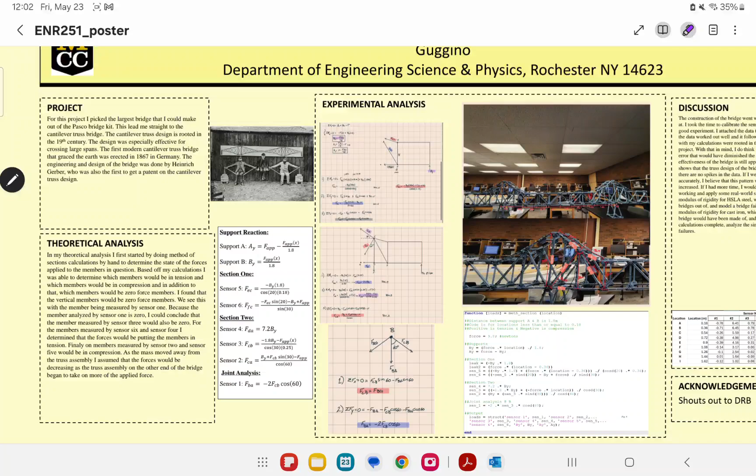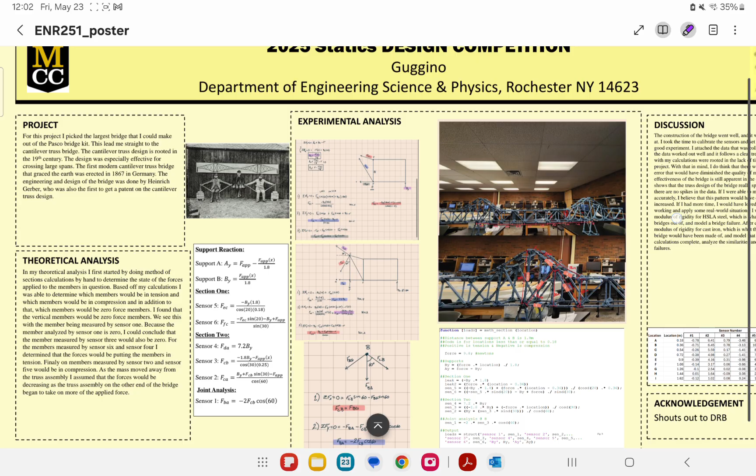Hello, my name is Cantilever Truss Bridge, and today I'm going to be talking about Nico Guggino. Wait, my name is Nico Guggino, and today I'm going to be talking about my 2025 project.

ENR251 final design project. For this project, I decided to build a cantilever truss bridge with the Pasco bridge kits that the college had provided to us.

This bridge, I didn't find it, let's just say it found me. It looked really interesting when I was looking through the couple of options that we could do with the bridge kit. And I'm really glad I picked it because it led me to some really interesting research, and I got to learn a lot about this really efficient design.

So I started the project after putting the bridge together, of course, with the help of Dr. Ben. I started with just some general research. I wanted to see if I could find anything in the country that looked similar to the bridge that I had built, and also what its origins were.

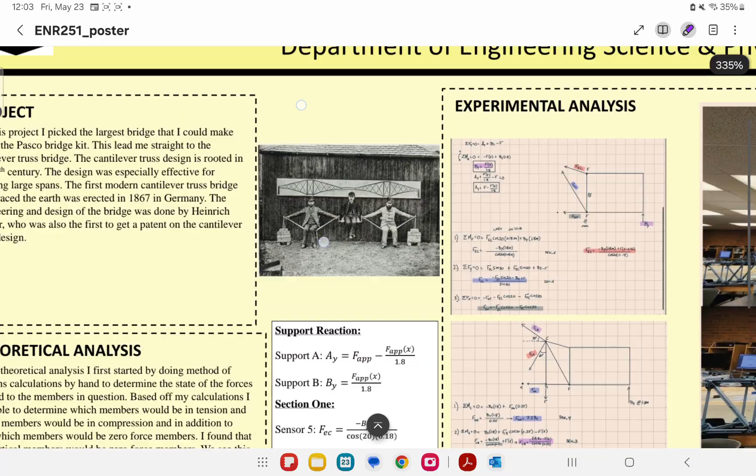So I was able to find out that the first erection of a cantilever truss bridge of this style was in 1867 in Germany by this gentleman right here, actually. That's Heinrich Gerber. He was the first one to design the modern cantilever truss bridge and also have it patented. And as far as I could tell, he's also the first one to have one erected. So it was really groundbreaking in that sense. You could see him there showing off the design.

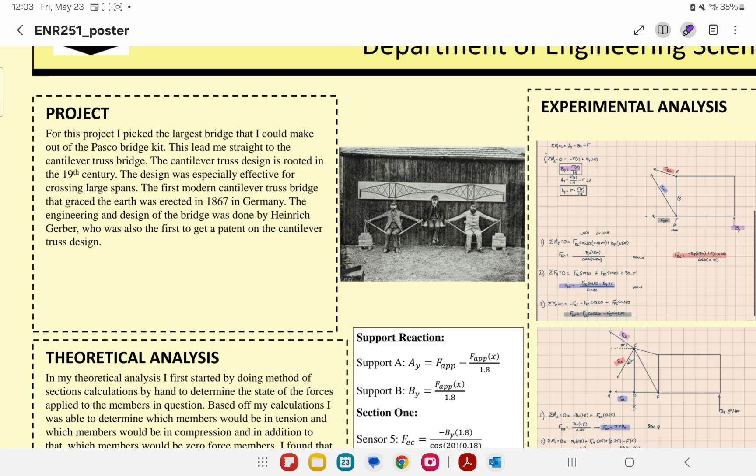So if we're looking at his simple display here, it actually really helped me do my theoretical analysis, which we'll talk about in a second. You can see, if we're looking at him, he's putting a moment on these guys like this, and they are acting as the truss, turning that moment into tension and compression. You can see this man's arm here, these arms here, are going to be in tension, right? And then all the compression is going to be in the lower members here.

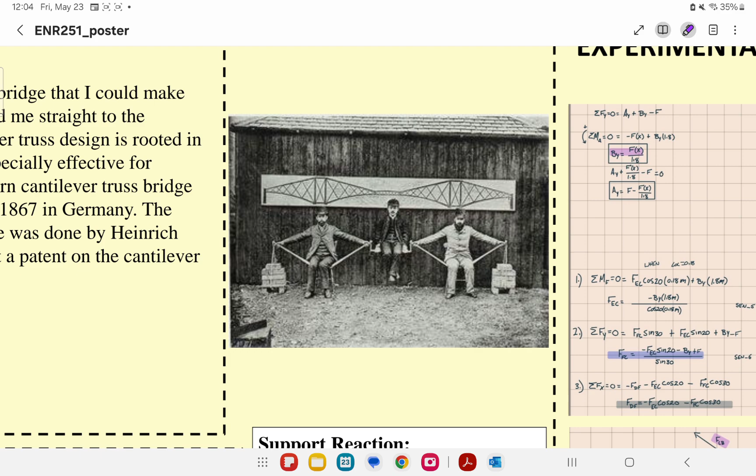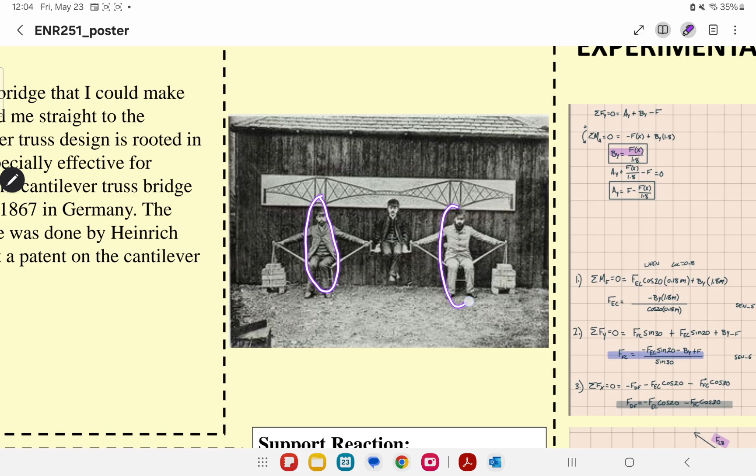When you're looking at the bridge as a whole, it's a little bit hard to dissect it like that. But when I'm looking at this photo with Heinrich doing the demonstration with his friends, it's a little bit more clear. And then you can see this man's torso - both these men, their torsos are not under any tension or compression, at least vertically.

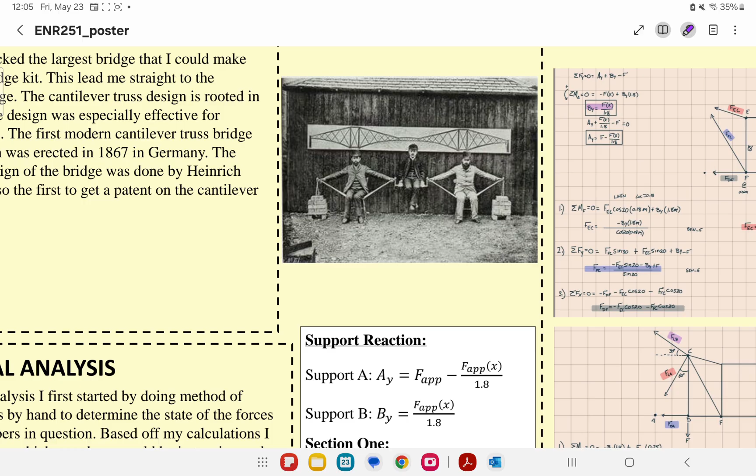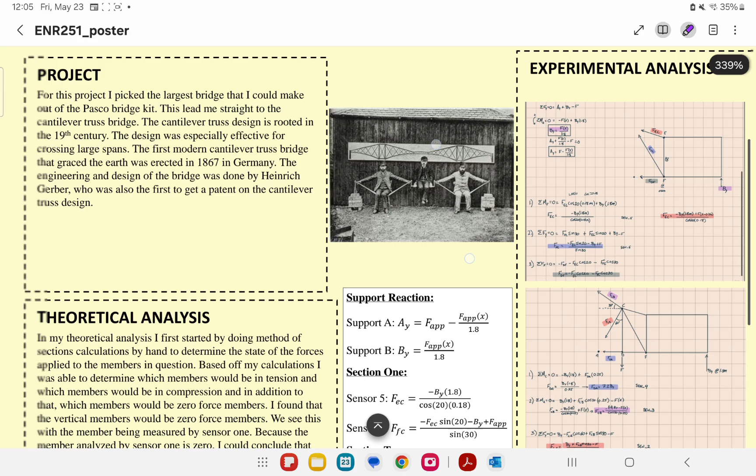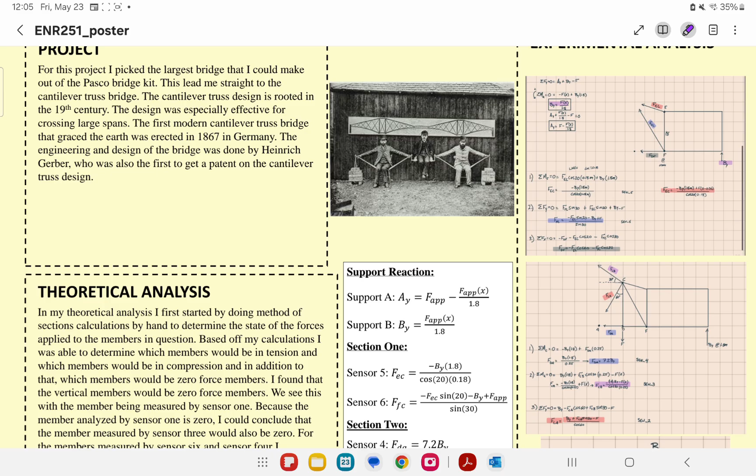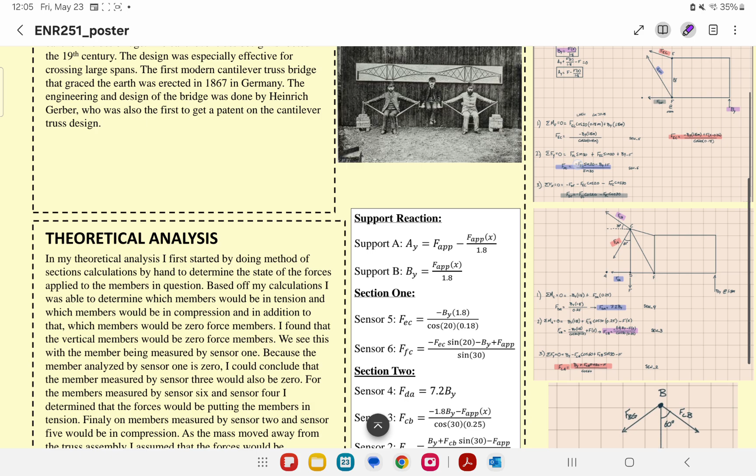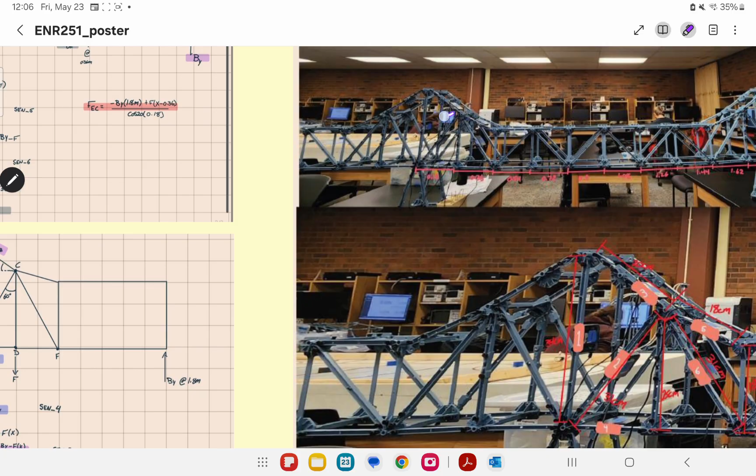So in my theoretical analysis, like we had just talked about, I had said that anything in this direction, anything at this support here - actually this picture would be better. For my theoretical analysis, I said that this was going to be in compression, and sorry, that this was going to be in tension. These were in compression, and then that this vertical member here was going to be a zero force member.

So I was like, if you're looking at this and comparing it to Heinrich and his friends, these are like the men's arms, right? And then I also analyzed the beams here labeled by 3 and 5 and also 4. These ones were a little bit harder for me to figure out, but using my calculations, I was able to determine that number 4 was going to be in tension. Number 3, surprisingly enough, is actually a zero force member.

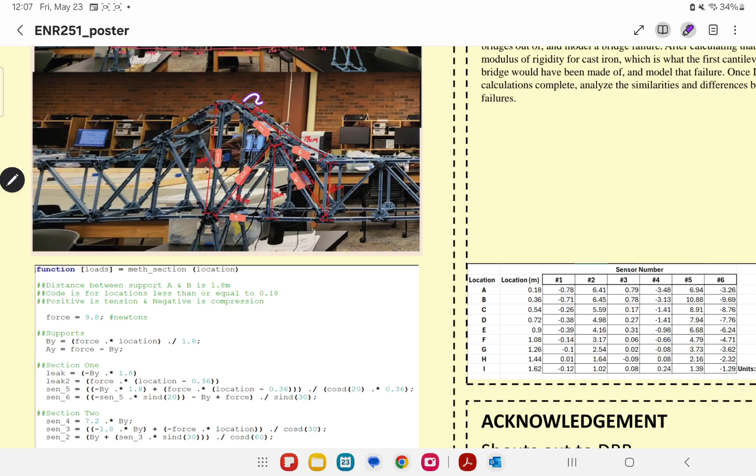And number 5 would be in compression, and quite a bit of compression, in fact.

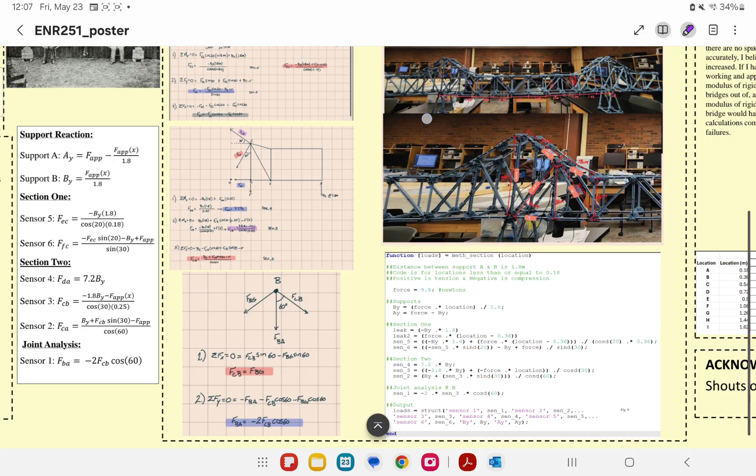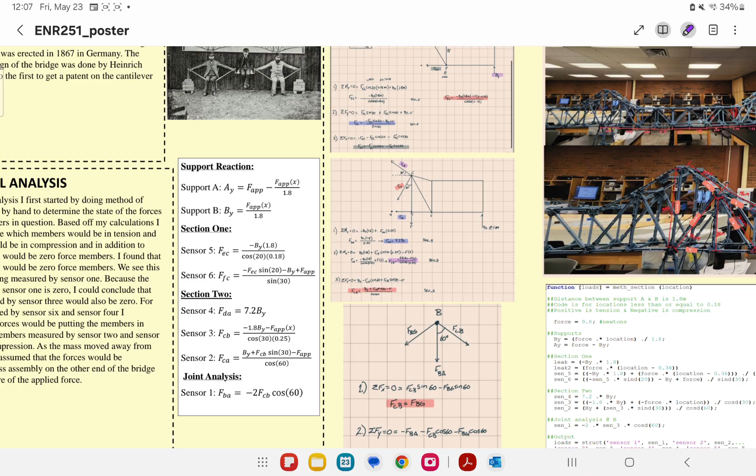That was my theory. So after I came up with some of that convention, I got into doing method of sections and trying to come up with a series of equations to model the experiment that I wanted to do. The experiment was to simply take a 1 kilogram mass and move it across the bridge.

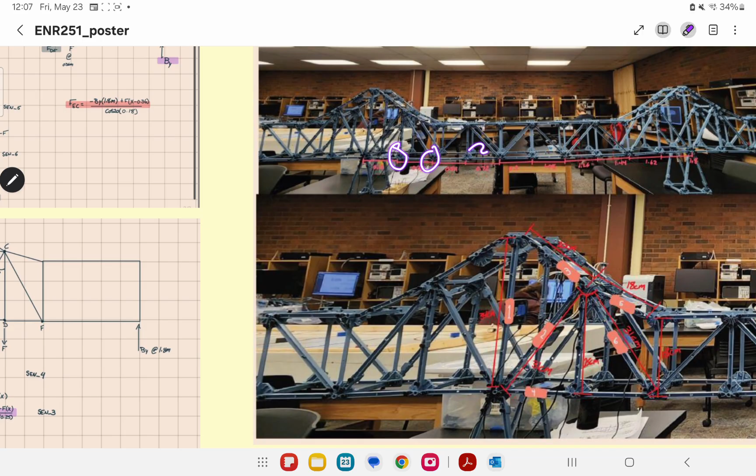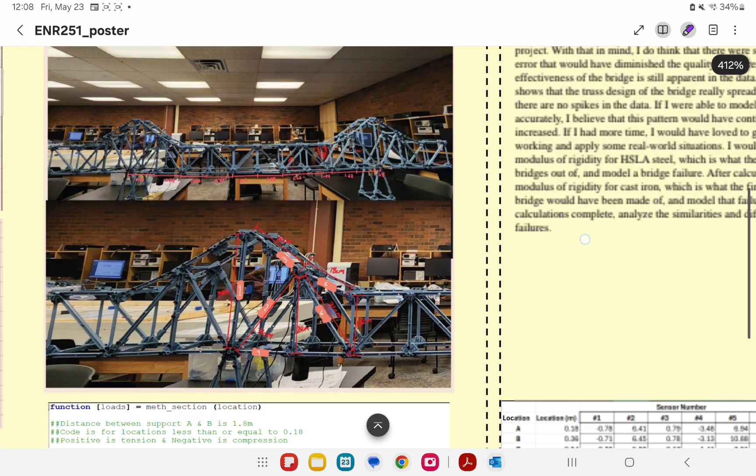I would hang it in location here, here, here, here, here, here, here, here, and here. That's 9 locations, A through I. You can see that in my table here, but we'll talk about that in a second.

After I determined what I thought was going to be in compression, what was going to be in tension, what was going to be a zero force member, I started doing some calculations to see if I could prove that. I was purposely trying to work without numbers, simply to make this easier to move into Octave after I got my system of equations down for the model.

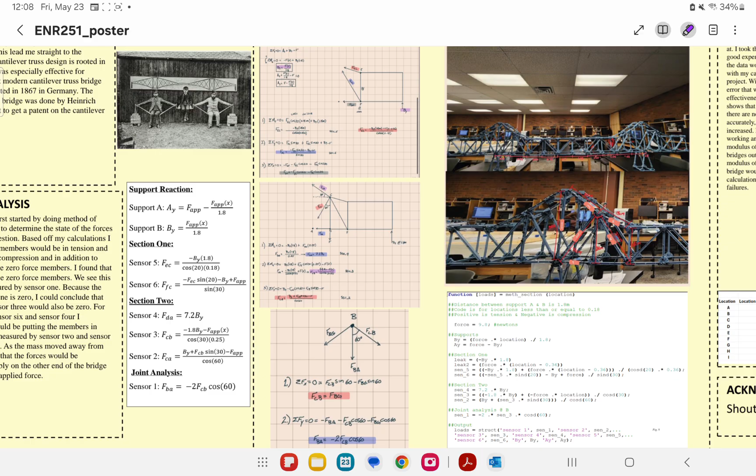This was because I wanted to move to octave. So if I could get this working with a basic situation, I could attempt to look at some more complex situations, of course, right? So in my method of sections, I started

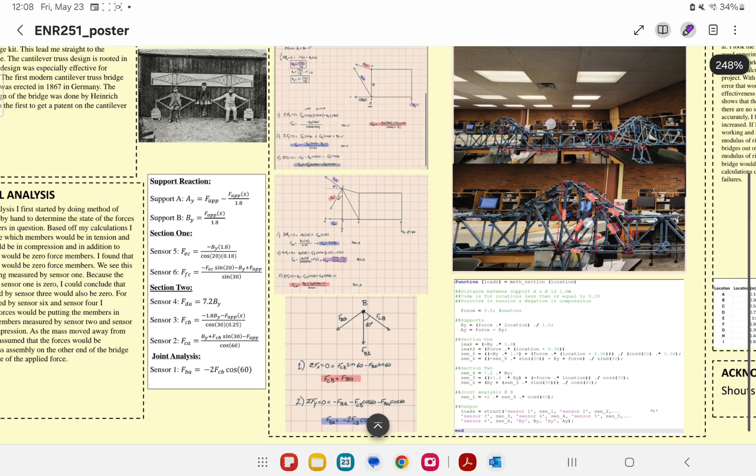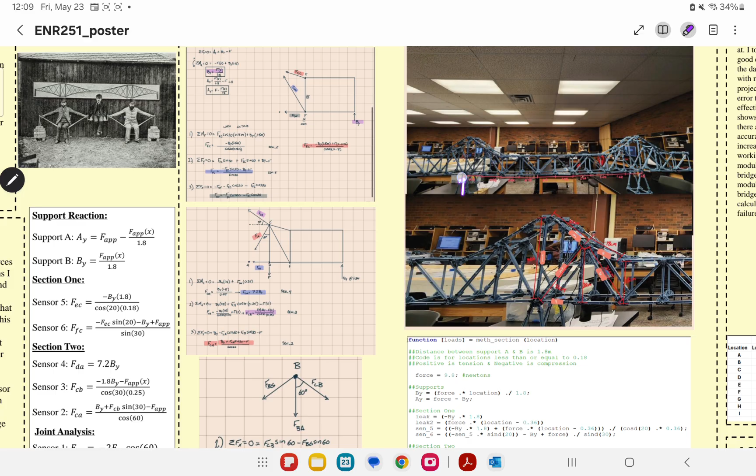with a slice here, and you can see that in this analysis here. Well, actually, what I should say is I started with my support reactions first. So I started with the support reaction here, AY, and I went to the support reaction here, BY. And after I got those, then I made my first slice here.

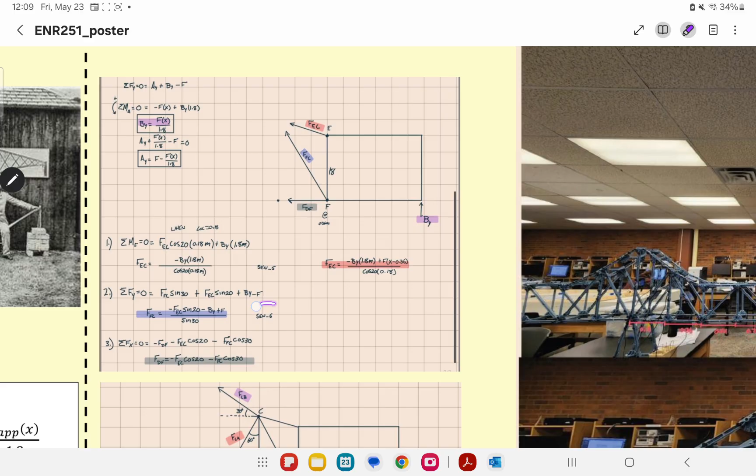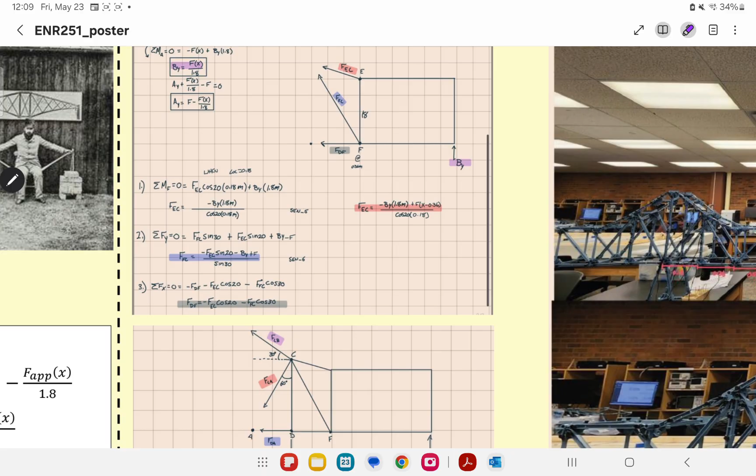Making that first slice, I was able to find the force in this connection from E to C, which was monitored by sensor 5. I was also able to find the force in this beam from F to C, that's monitored by sensor 6, and included in that, for no extra charge, I got the force in this connection from D to F, which I didn't have a sensor on, so you won't see it come up anymore.

After I did that, I just kind of worked my way back. My next cut here was going to be through 3, 2, and 4. And from that section, I was able to get the force in the connection from D to A, which is

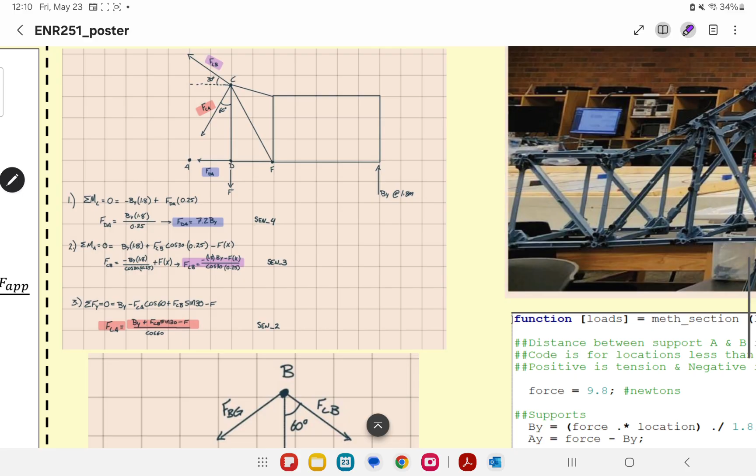monitored by sensor 4. I was also able to get the force within the connection from C to B, monitored by sensor 3. And I was also able to get the force in the connection from C to A, which

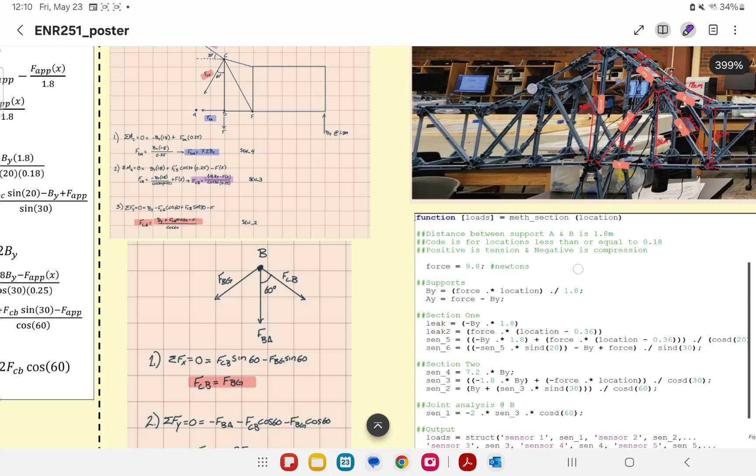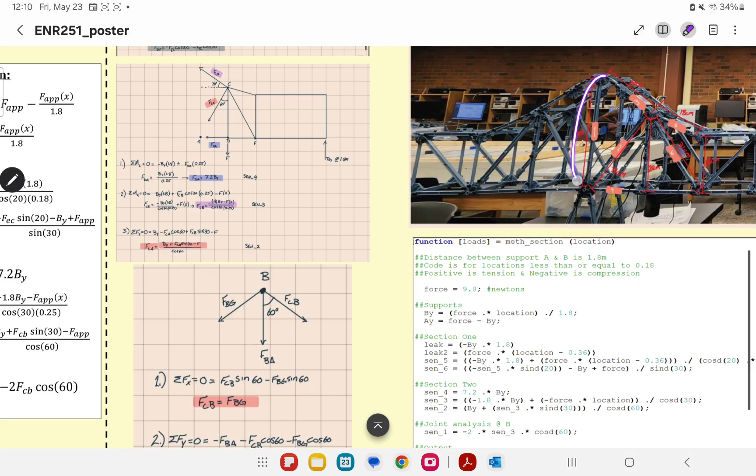was sensor 2. Now, the last member that I had to get to, which a little bit less exciting, I had predicted as a zero force member, would be this member here. And I did that by joint analysis at this joint here, which you can see.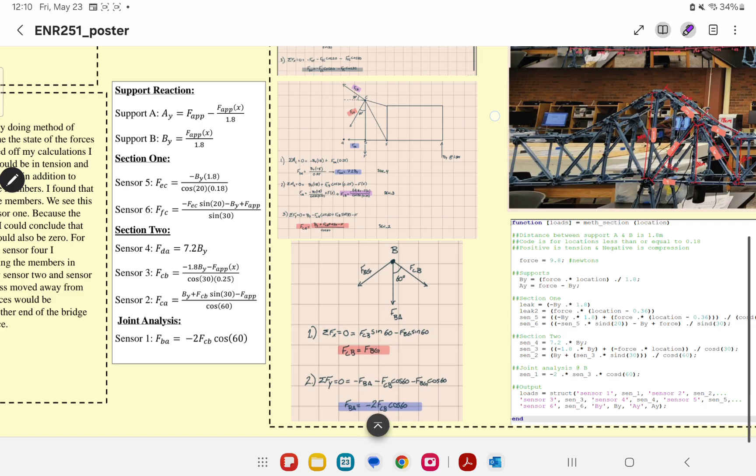So I was able to do that, get all of my equations. I then made my equations a little bit easier to look at here for you in that figure there, but I won't spend too much time on that.

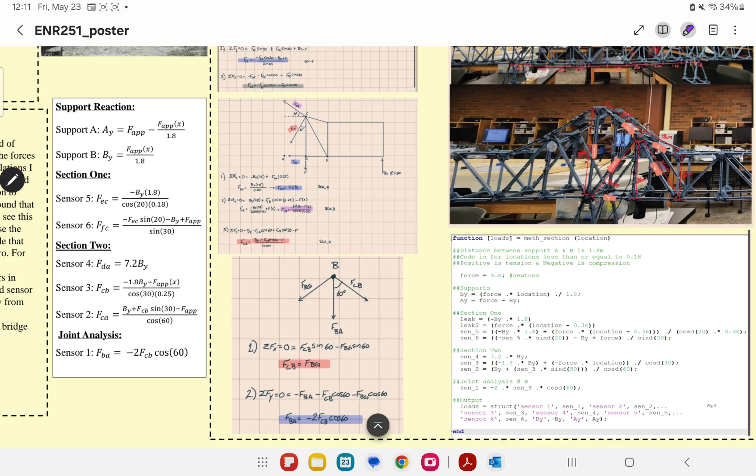I moved those equations in this form into octave with one variable, which would be the location. My mass wasn't changing. The only thing that was changing was my location.

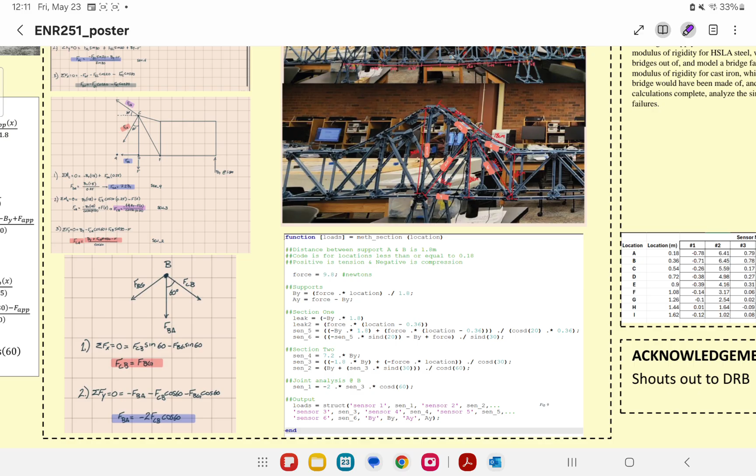So I wanted to be able to enter in which location I was interested in looking at the values for, and from there be able to get the output, which would just tell me the force at sensors 1 through 6, and also the support reactions, because they're also important.

So to do the output that I wanted, I used a struct, and that struct, in theory, would have made graphing this a lot easier if I got to that point. But here's where we'll start talking about where the wheels fell off on this a little bit.

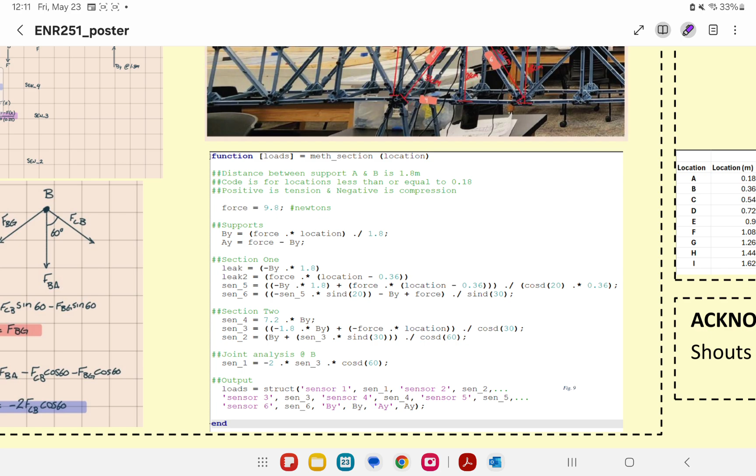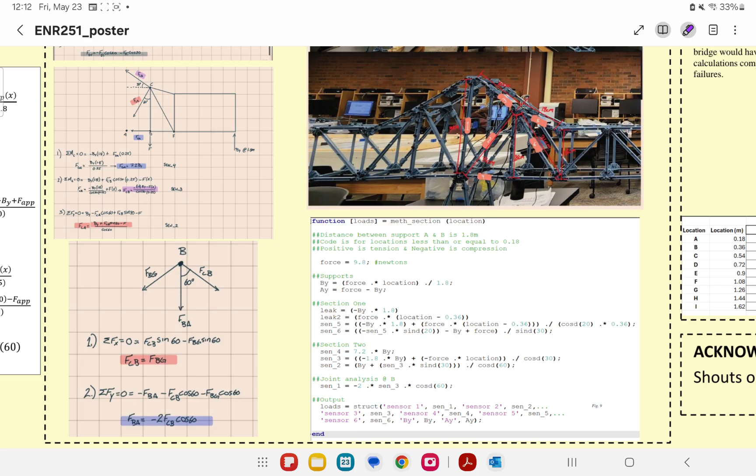I think I definitely had some mistakes in my calculations, and I think there were some factors that went overlooked that did not allow me to get an accurate modeling of the bridge and the situation that I was looking at.

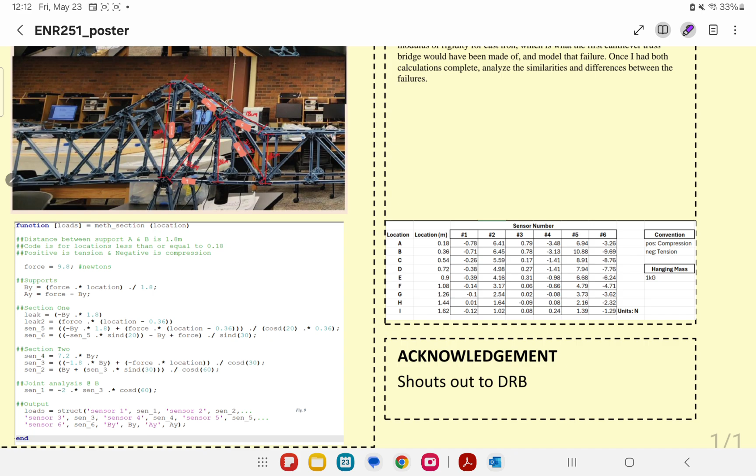I think the data that I collected, here, you can see in that table, I think that data was valid. It seems to make sense as the weight moves from this side of the bridge to this side of the bridge. As it moves, the load, the support reactions decrease from A to B, which is what you'd expect.

And the loads—I was analyzing this truss—the loads within that truss also decrease at the same linear rate as the support reactions. So the loads within the trusses were directly proportional to the support reactions that were being felt from beneath said truss. And the data makes sense to that.

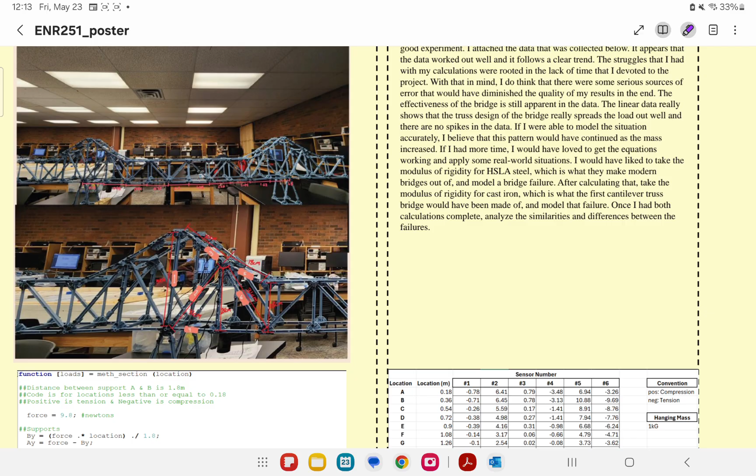As much as I would like to blame it on bad data, I can't. My calculations were able to align enough with the data I collected and my theory to correctly give me the proper convention of force within the member or at said sensor. So if I was curious whether it was tension, compression, or zero force, my code could tell me that, but it couldn't tell me any accurate readings for the sensors.

So I really didn't pursue it any further, which is why you're not seeing any graph. Yes, I could have graphed the data here, but like I said, it's really easy to see—it's just linear. So the straight lines wouldn't have really told us much, so I didn't see much value in graphing it.

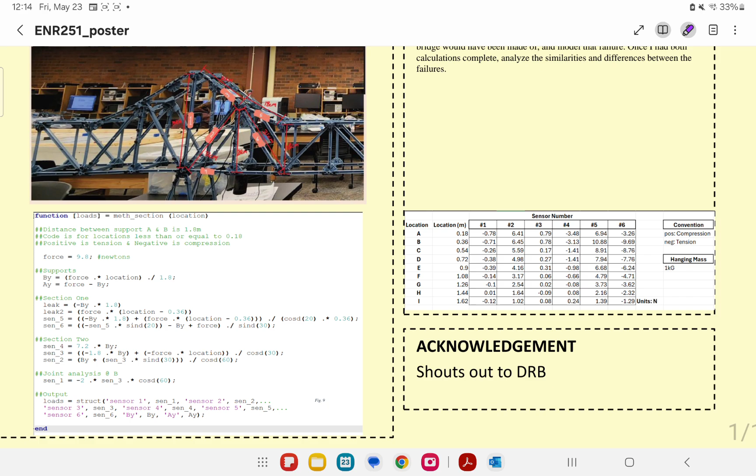I figured it'd be better just to talk about it. So that kind of brings me towards the end of this presentation here. I was able to give you guys some insight on the experiment I did with the moving mass, a little bit of history on where the cantilever truss bridge comes from and its origins, also where it's used today, and also a glimpse into the process that I followed and what my goals were with that process as far as it relates to trying to create a model, a set of calculations for this scenario.

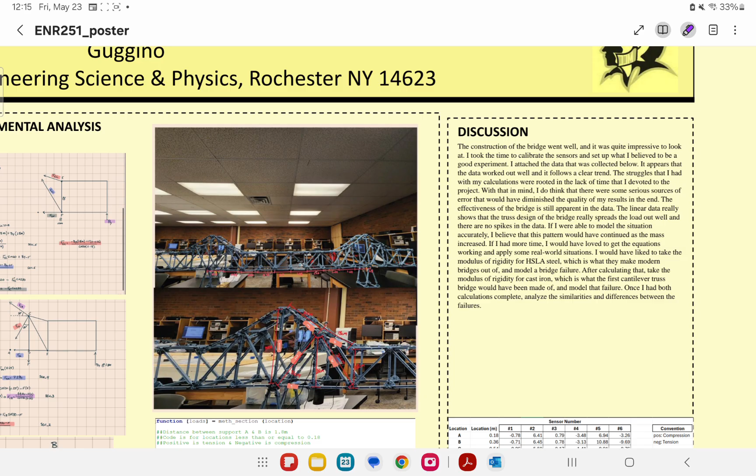So all in all, I'll tie it together here. I think the construction of the bridge went well. It was massive and it was fun to look at. I think the experiment portion of it went well too. Like I said before, I took my time and I calibrated the sensors. I think the data I collected was valid, and the process I followed doing the physical experimentation was sound. Could I have done more trials? Yes. Would I have done more trials if the time allowed for it? Definitely. I would have loved to try a couple different masses and play with data that way.

But I think my shortcomings really lied within the calculations. Like I said before, I think there were some key aspects to getting those calculations to work that went overlooked by me. So I think with a little bit more time spent on the calculations, I could have gotten those sorted out. And unfortunately, since that was such a core piece of this project, the wheels kind of fell off there.

I think my intentions of moving it into Octave and using Octave as a tool to model the scenario were sound, and I think I would have been able to show off some pretty cool stuff in the end. But my wheels were turning, even though I was not succeeding with the current spot I was in—my wheels were still spinning.

I had hopes to get this modeled successfully with the single mass and the different locations, and then attempt modeling a couple different types of build materials and seeing where this bridge would fail based off some real world factors, as in the material it was made out of and its modulus of rigidity, how much weight was hanging off of it and where it was located, and some things like that. So if in the future I ever have any time to take a look at this, I think that's the direction I would go.

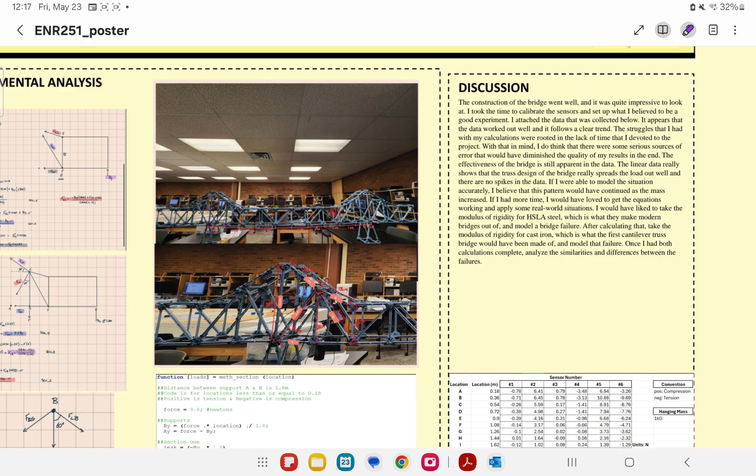But I definitely learned a lot through this process, and I had a lot of fun writing the report, and I love researching engineering and design, which is what this project really boiled down to. So I got to learn a lot of cool stuff about cantilever truss bridges, and I can bore some people about that in the future.